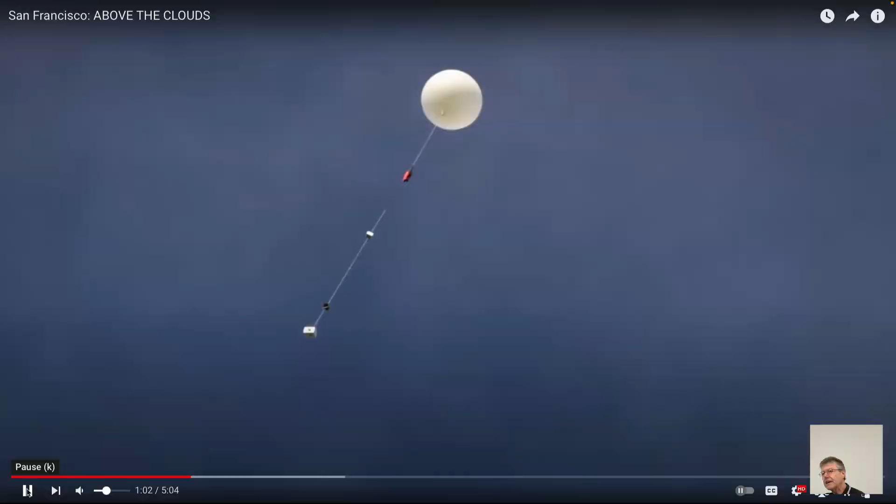It's kind of cool - a bunch of youngsters making a balloon.

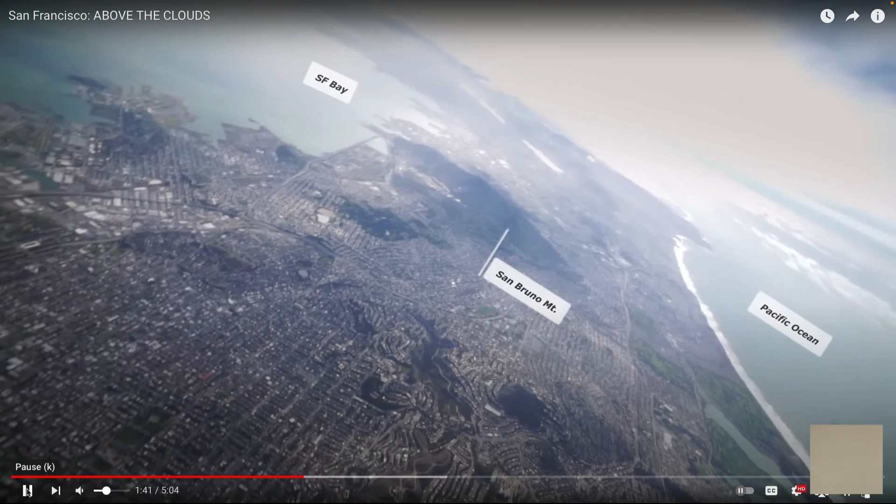Of course, it's kind of in the flight path. As you take off north out of San Francisco International, you go right across the east side of the city on the bay, so I'm not sure how that quite works out, like a flight path.

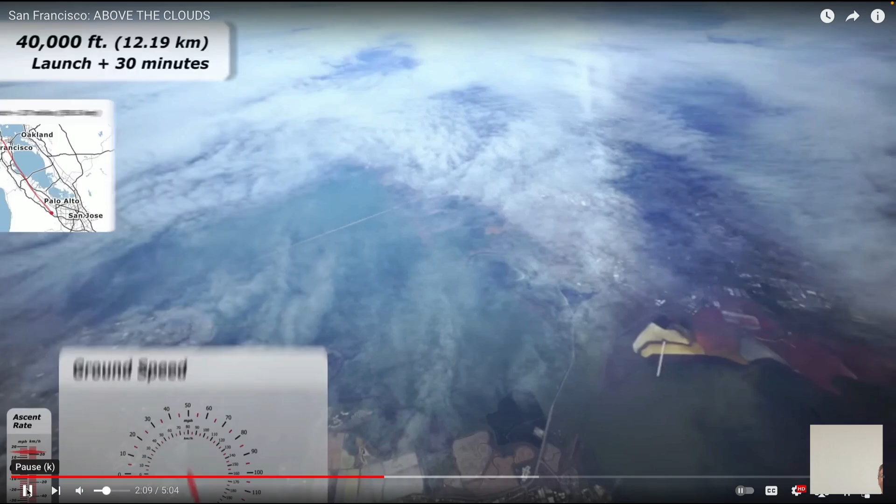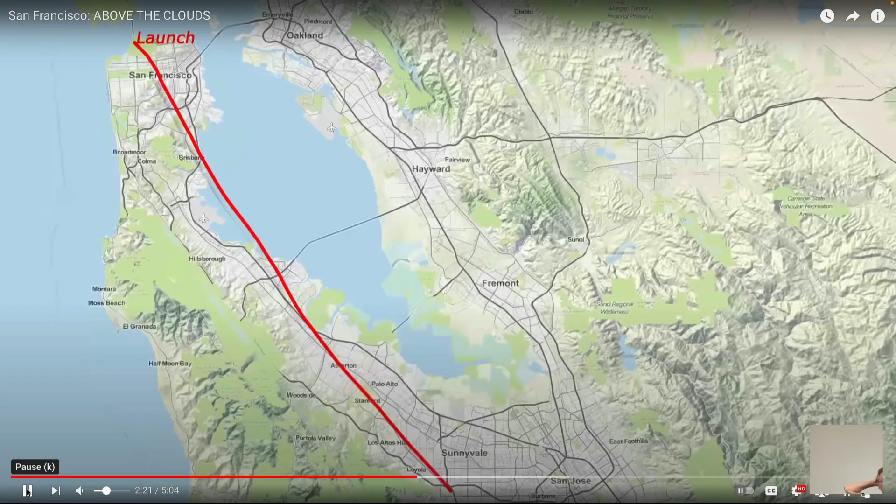Actually, that's pretty much the path of the San Andreas Fault, as it turns out.

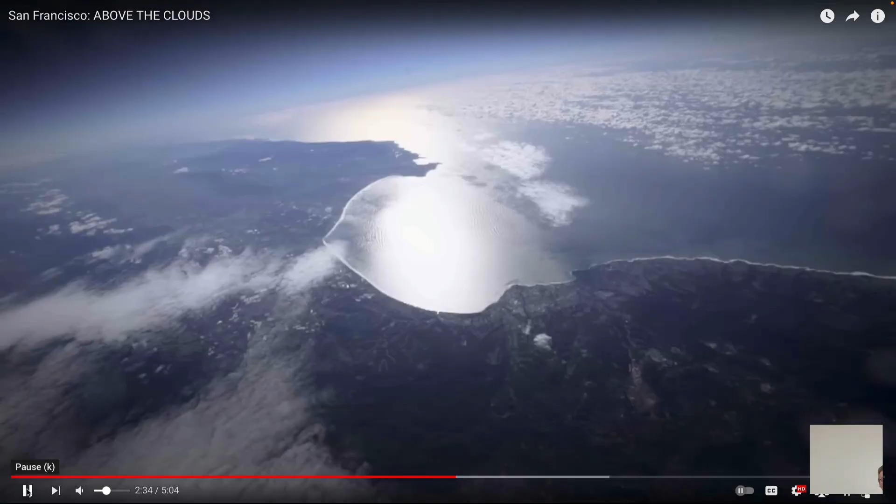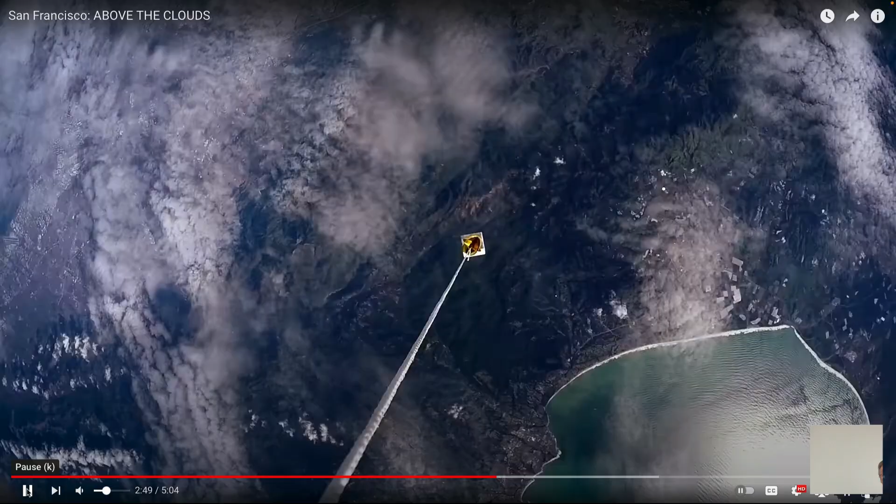So, 90,000 feet - so planes are, I guess, below the flight path now, right? For sure, planes would go up to 36,000, something like that - 10 kilometers.

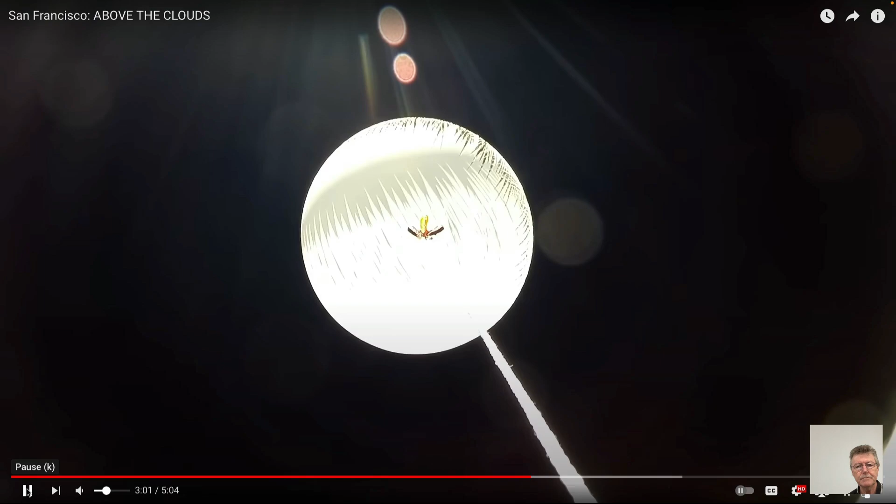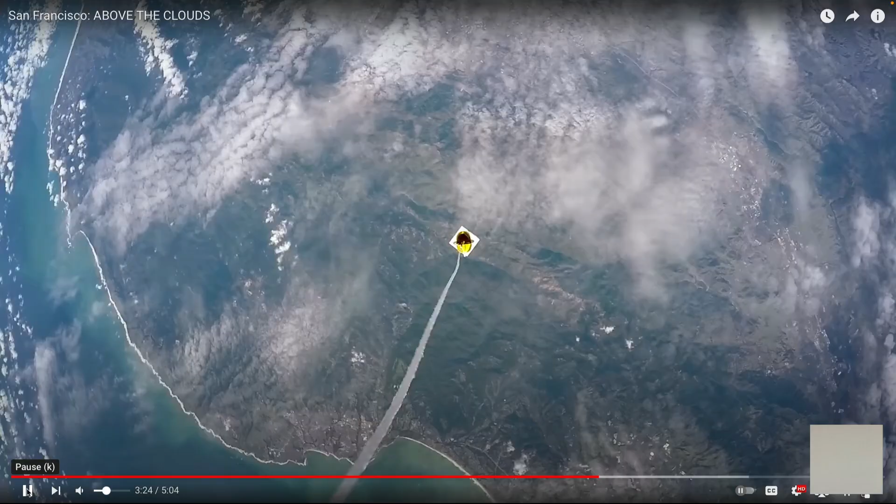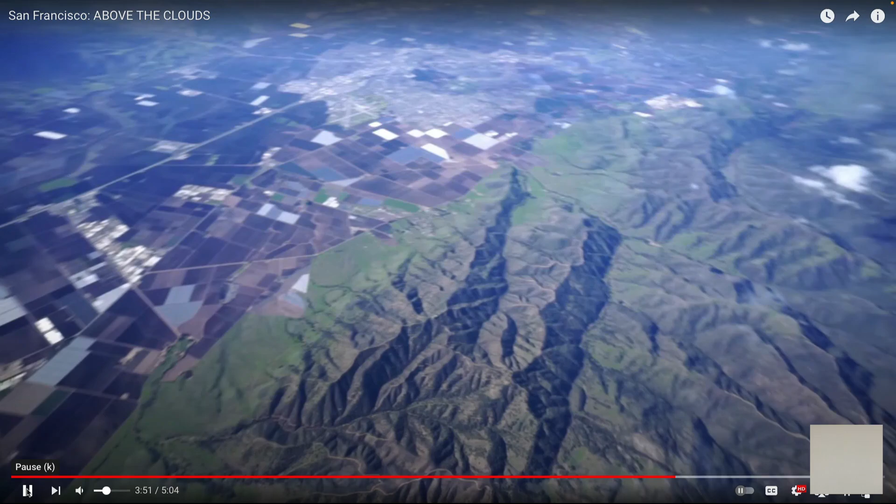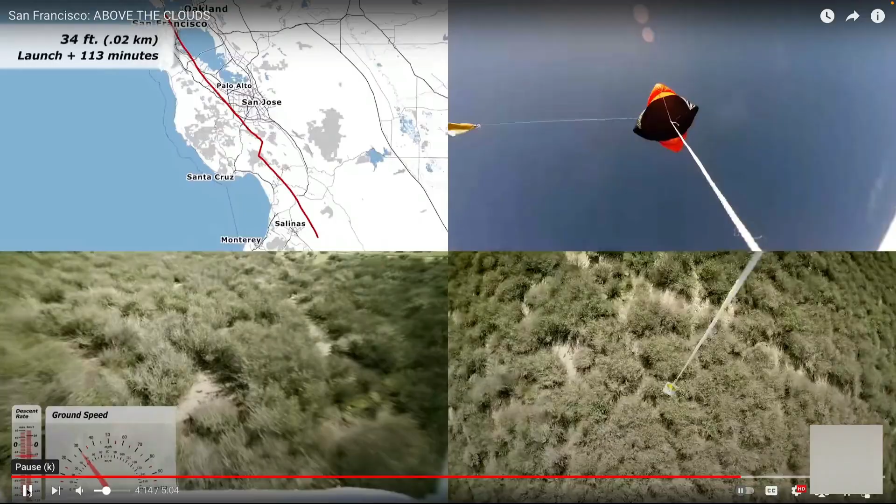And so it shatters, it comes down on a parachute. They must have GPS attached to it - they go looking for it, and then they retrieve it. So, yeah, pretty clever.

The exuberance of youth. Yeah, fun. So, anyway.

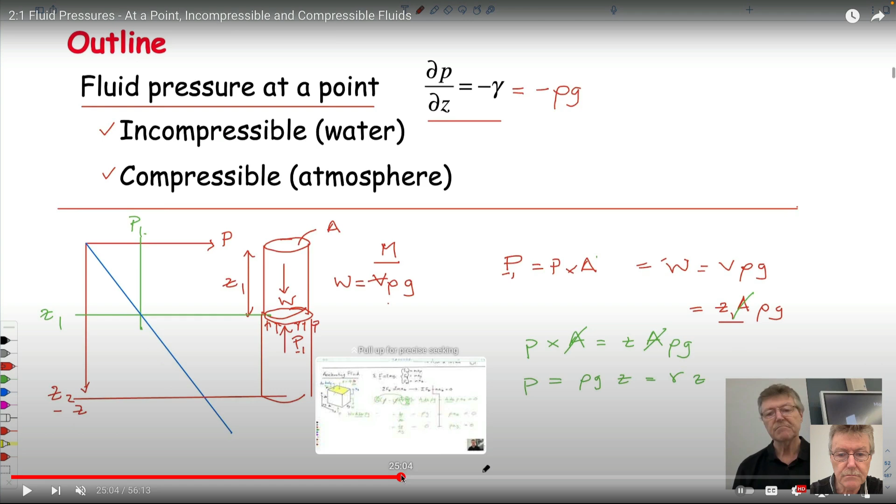If instead of a round bucket we take a differential cube, dx by dy by dz, we work in what's called a right-hand coordinate system. This is my right hand, x, y, z. In our class, z is always vertically upwards, increasing with elevation, just for the sign convention we use.

We can take this bucket, now a cube, and look at the forces applied to it. We have the weight of the fluid in the weightless bucket, which is just the area times the height times unit weight of fluid. We could apply a vertical acceleration to it by pushing it up in the vertical direction, or in the x direction, or in the y direction.

We can look at how pressure changes from underneath the cube to a small change in pressure dP. If we multiply this by dz, we have a change in pressure with z. It doesn't matter, it's explained to you if you look at the movie.

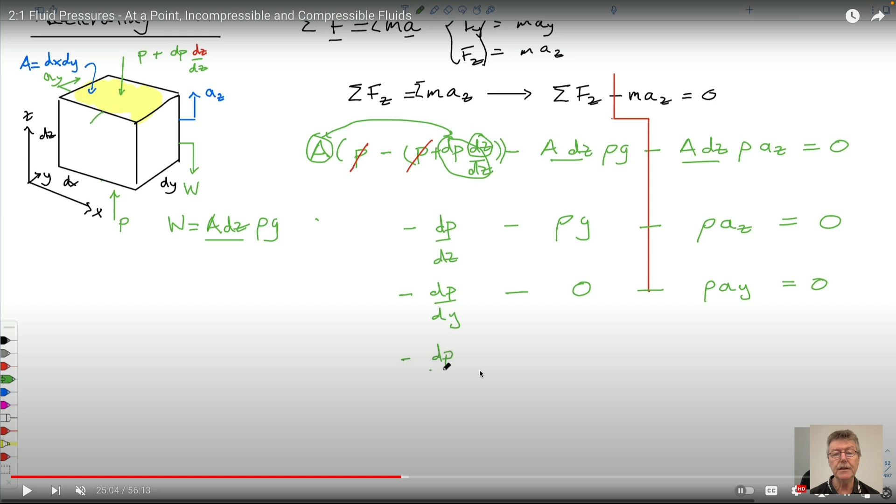We can now get a little more sophisticated in the expressions we get. We end up with three differential equations, resolving first in the z direction, then the x direction, then the y direction. Just F equals ma. The line being drawn down here separates the part which is mass times acceleration, density times acceleration, from the part that are the forces, part of Newton's second law, F equals ma. It looks complicated because it's a differential, but these are the expressions we get.

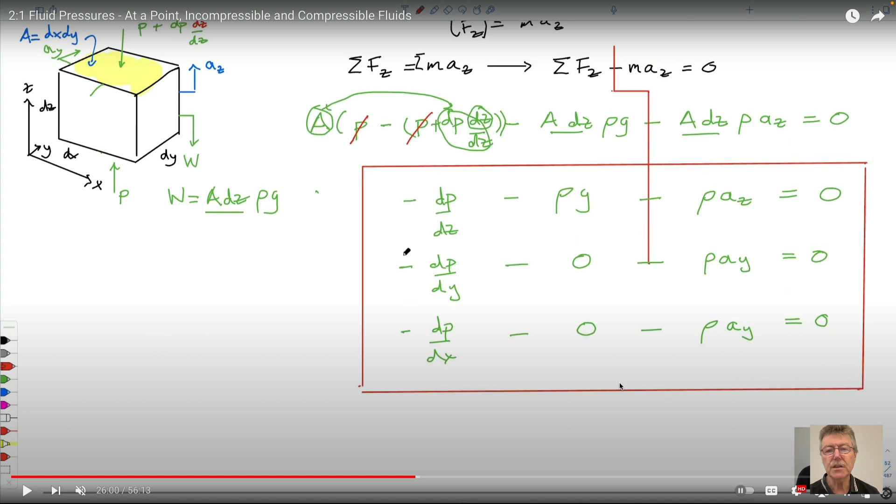In the first part of the class we'll use those, but we'll first take these acceleration terms and throw them away, don't care about them. In that case we're left with slightly simplified equations.

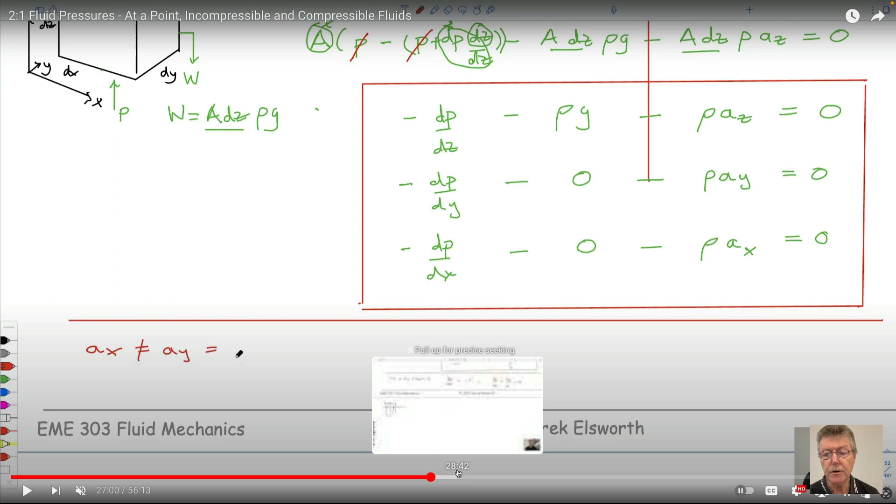If we throw this term away and look at the equations, we end up with these expressions: the rate of change in pressure with depth is equal to minus the unit weight. Unit weight is density times gravity. That's true whether we have a liquid or a gas. It's important to know that it's just that the unit weight will change in a gas with pressure, and we have to know that.

From the other two equations, we get that the pressure change in the x direction and the pressure change in the y direction are both 0 — we've already used that. The drawing to the left is our capillary tube. Remember, we can cut it off at the bottom, lift it up, and hold the cylinder of water up by surface tension, because we know it's atmospheric pressure underneath. If we move from atmospheric pressure here to that same point, and x is the horizontal direction, the change in pressure as you go in the x direction doesn't change — if you're on the same level, by definition you have to be at the same pressure. So we've used that already.

I'm not sure we've used this one already, but we'll use it today: pressure at a point acts the same in all directions. Pressure in the x direction, the y direction, and the z direction are all the same in a static fluid.

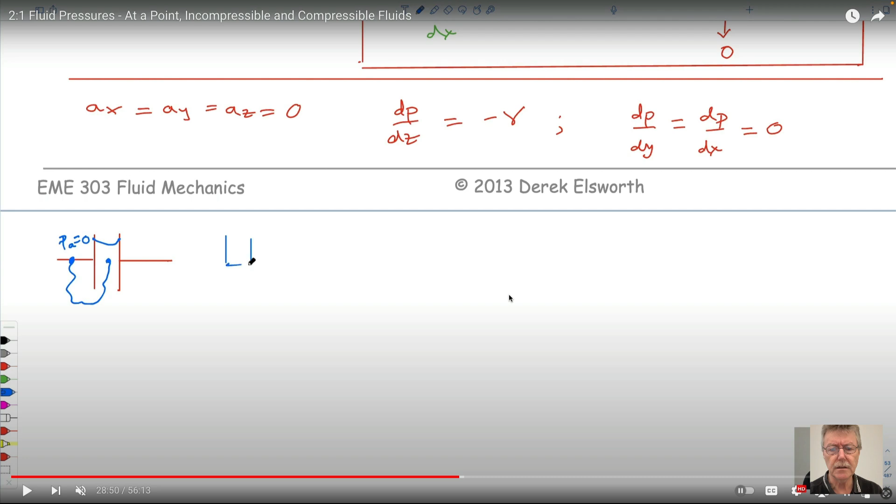What a nice looking guy there — just caught him out of the corner of my eye. So, fine, if you've also looked at it, perhaps we'll do it today.

The other thing we can do is note that this is a function of density times gravity. For a compressible fluid, like the air around us, density changes as a function of pressure. If pressure is in this term, then we have pressure on both sides of the equation, so things get more complicated — it's not such a simple expression to solve.

If we're in water, in a swimming pool, then this is all that the derivation gives us — you should have seen it, don't worry about it. But let's have a look at this.

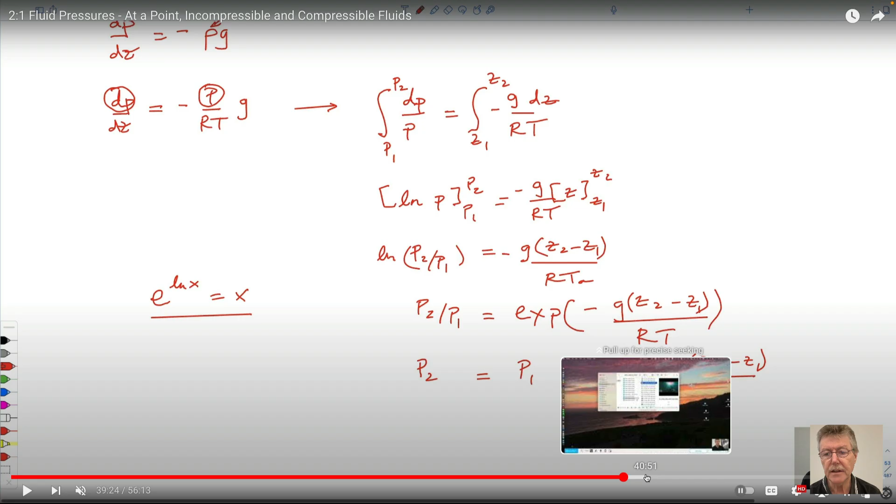Let's look at exactly what that should look like. We talked about absolute pressure and absolute temperature. Absolute pressure is what we sit at, about 100,000 newtons per meter squared — the pressure of the air above us, the column going up through the troposphere, stratosphere, and so on. Actually, from that pressure and the ideal gas law, you could calculate exactly how many air molecules there are in the world if you wanted to — it's a pretty simple calculation.

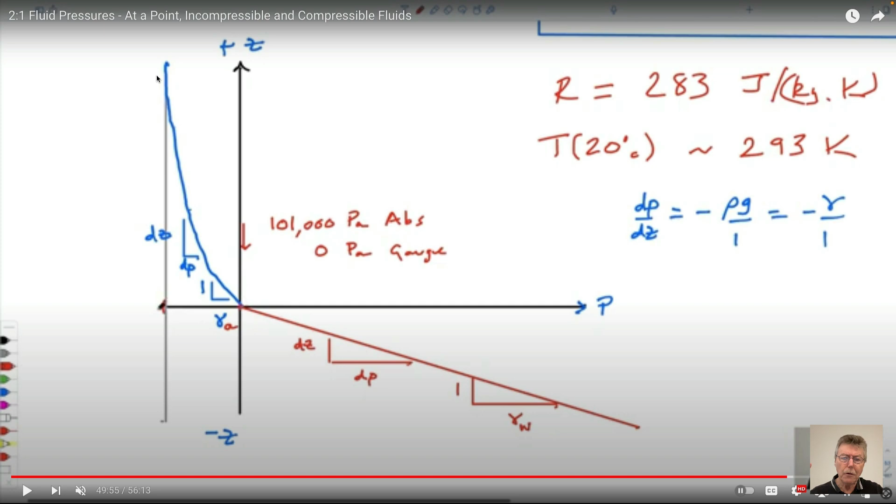So that's the difference - that's what you would have seen if you looked at the material over the weekend. That's our task for today.

I will start off from this. I'm not sure if I answered your question, but hold on - I'm not sure. So these are the same expressions that we had, that I noted.

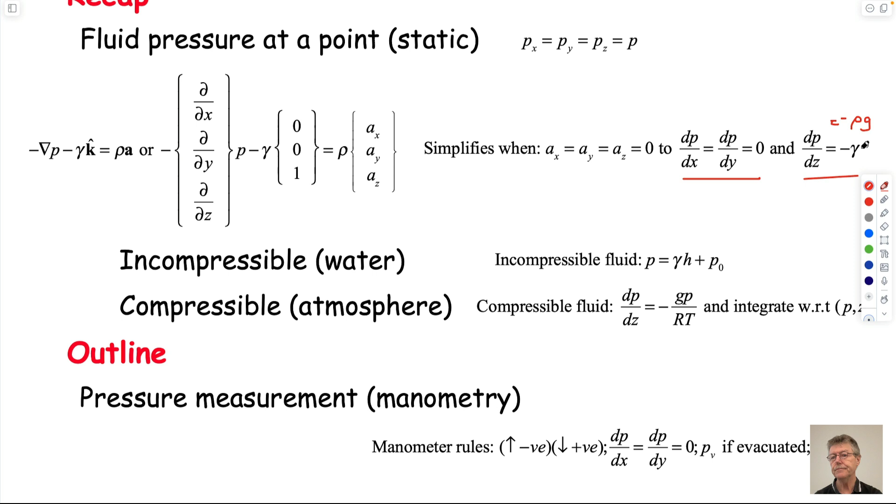These are the same equations we wrote out, and as I mentioned, the only two expressions that are important are that the pressure as you go horizontally stays the same in a static fluid, and as you go vertically in a static fluid, the pressure changes according to the density times gravity - the density of the fluid as you go through it.

What you can do, and I won't do it here, is take this expression and write it as dP is equal to minus unit weight dz. You could integrate between Z1 and Z2, and P2 and P1.

And if you did that, you'd end up finding that if you plot pressure versus depth - this is positive Z, this is negative Z - then we end up with something that looks like this for an incompressible fluid.

And it's exactly this expression here, and what this is equal to is P1, this is equal to P2, this is equal to Z, which is negative.

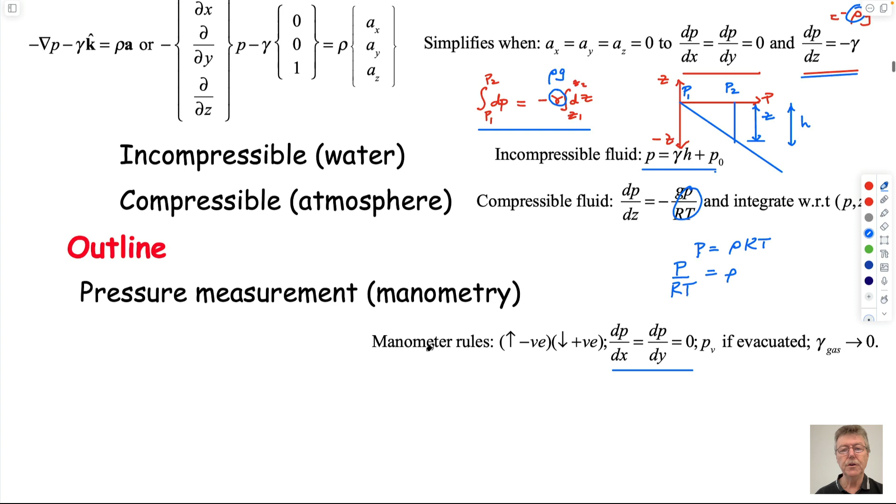You can use these two things you know: how pressure changes with depth, and the fact that pressure doesn't change as you go horizontally. We can use those to make measurements of pressure, which we'll spend most of today doing.

So these are notes here. We did this last time, so I'm not going to go through that again.

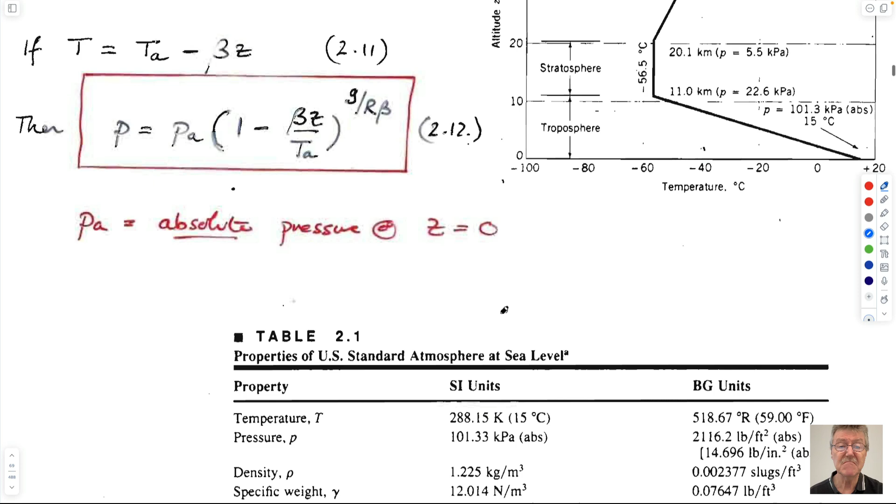So how are we going to use this? I will do this, I will go here. I guess this is what I wanted. Let's listen to this.

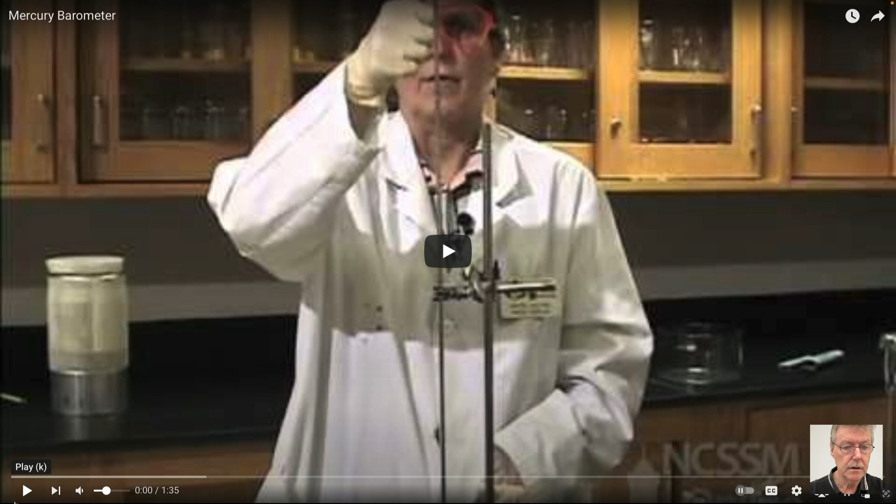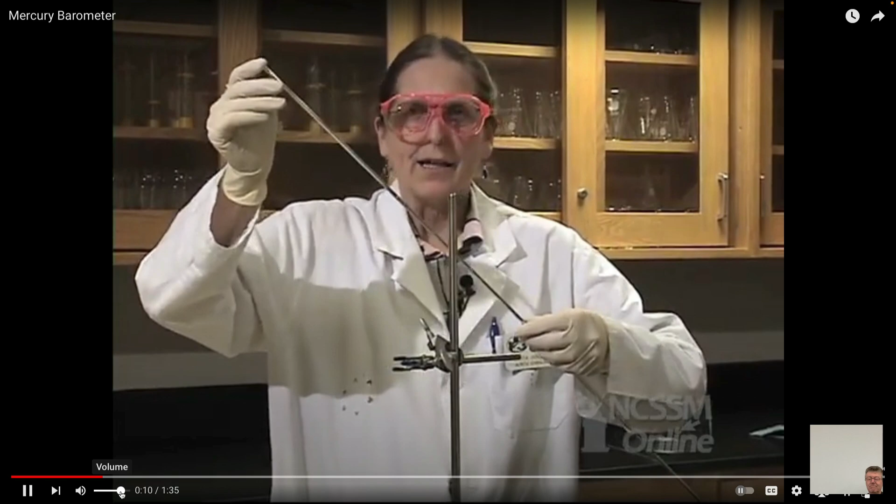We're going to make a barometer. What I have here is a glass tube that's about 800 millimeters long, and I've filled it with mercury almost to the top. I'm going to finish filling it all the way to the very top, then put my finger over the end and invert it.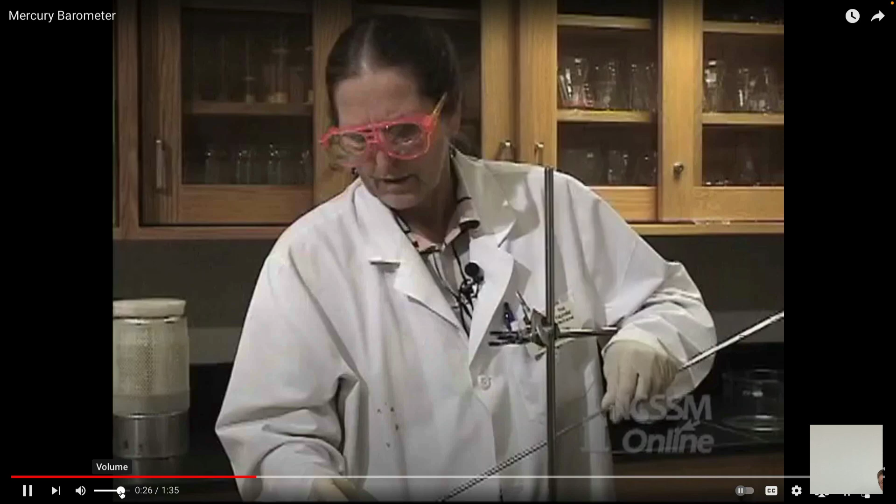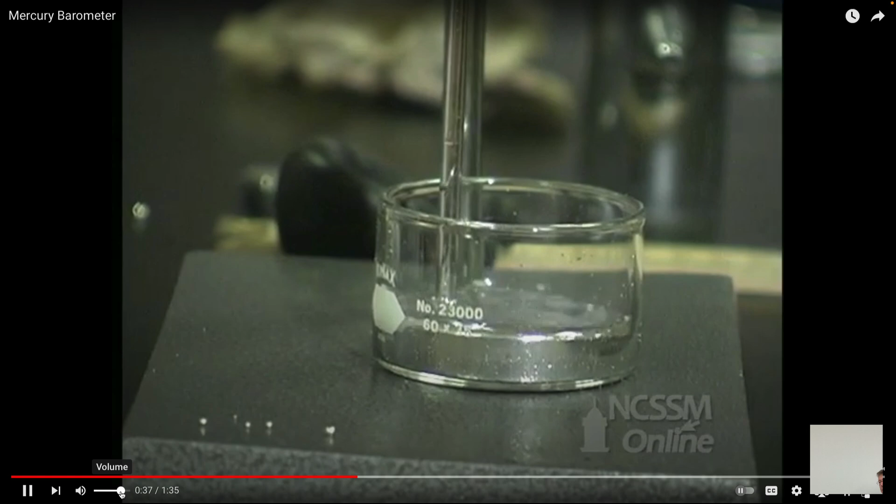I'm going to invert it into the mercury, set it here, and use our little beads of mercury floating to hold it steady. Now what's keeping this mercury up? It's atmospheric pressure pushing down on the mercury, pushing this up.

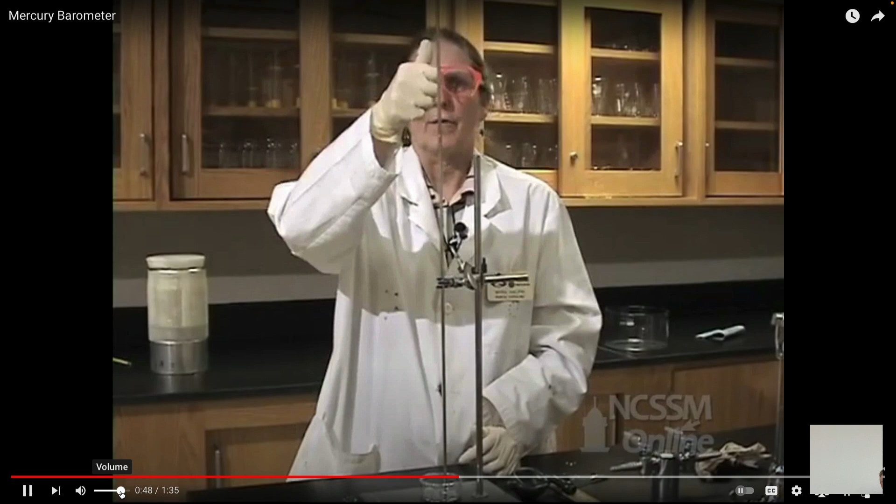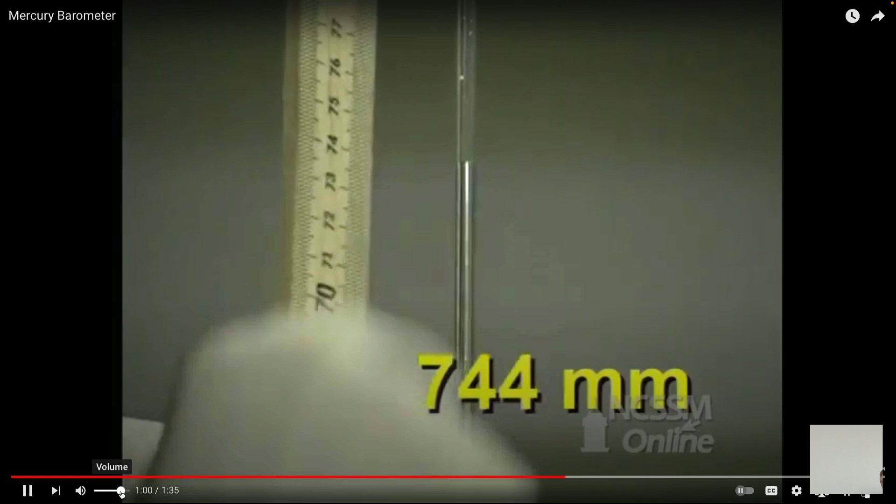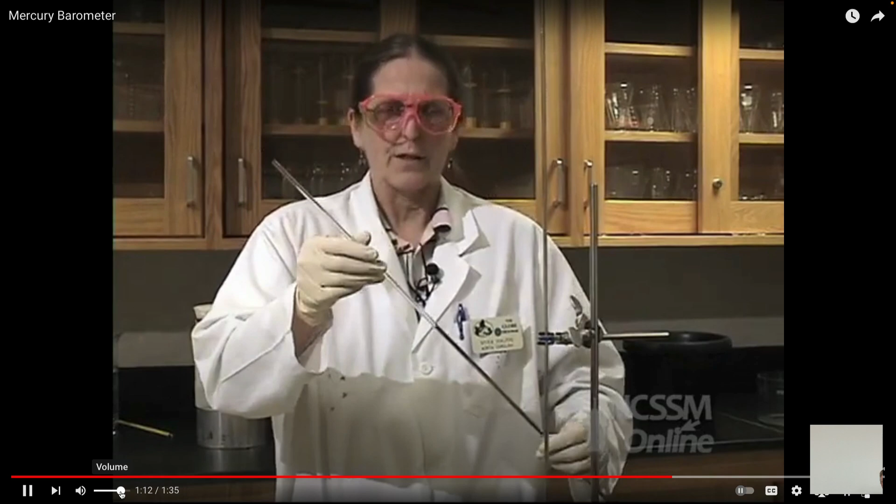Let's see how tall our column is: 744 millimeters. It doesn't matter what size the diameter of our tube is, as long as it's relatively small. You can see this one's really small, and I have another one that's almost twice the diameter, but it doesn't make much difference — the level is the same in both tubes.

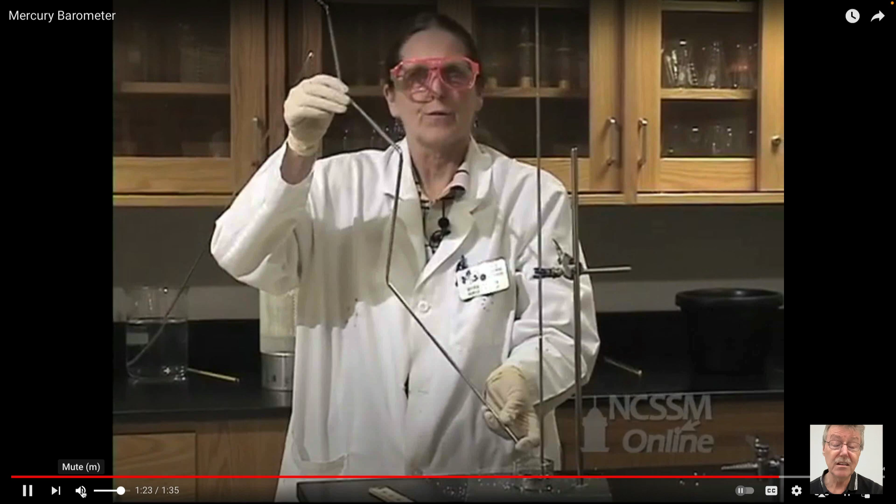What we're going to do is compare this barometer to the barometer we already have. Notice it rises to the same level. Okay, that's quite useful to us.

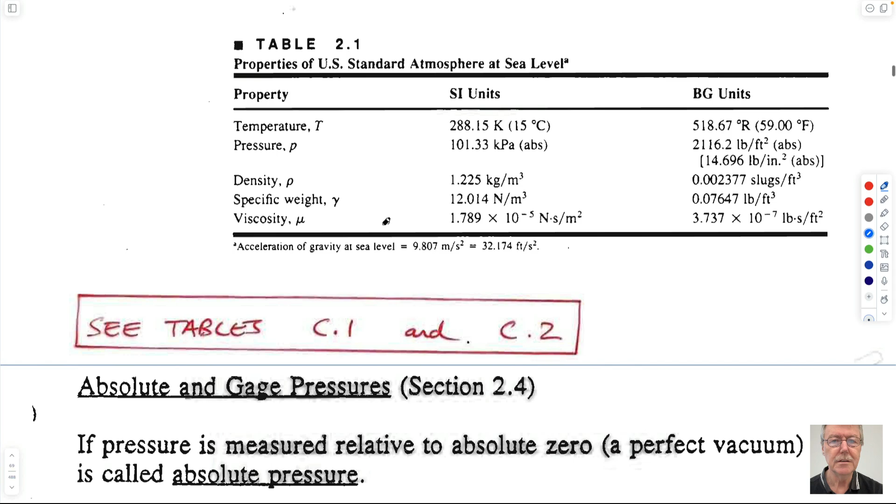So we're going to try to measure some pressures. I don't know whether it's best to look at these notes or explain it myself, but a barometer is quite useful for us here, because it accommodates all the rules of manometry, which I've written out — the manometer rules, five rules, and the barometer kind of encapsulates them.

If you go up in a fluid, the pressure decreases, so you can subtract off the pressure. Pressure is equal to unit weight of fluid multiplied by H, plus P0. Perhaps we can draw it slightly differently.

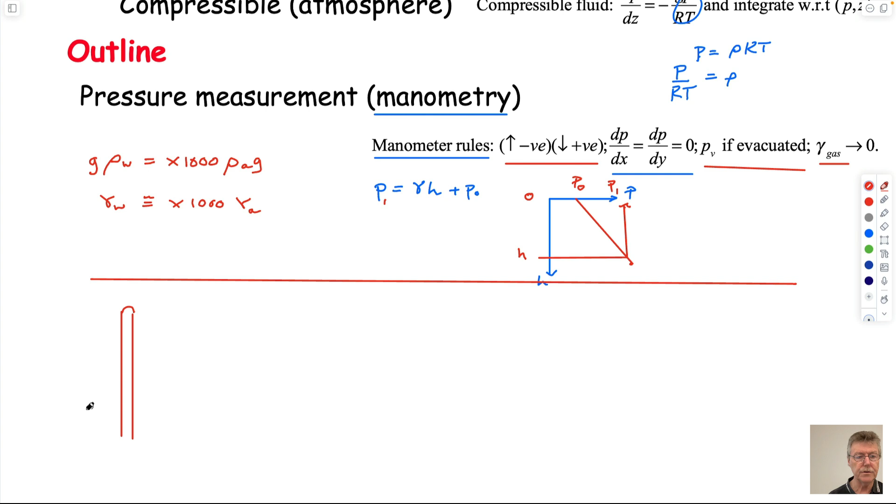It probably doesn't matter, it could be water, I suppose, right? Didn't change. It's worthwhile talking about these things. What happened was we got a meniscus. We have a height rise. And we have atmospheric pressure. So what we'd like to do is figure out exactly what this atmospheric pressure is. We don't know what it is, so we'd like to figure it out.

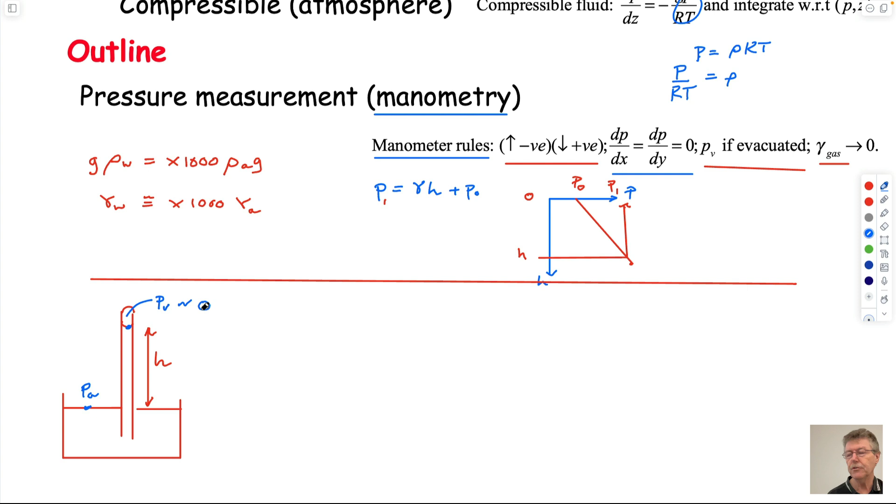If we know the pressure in here is the vapor pressure, it's almost equal to 0, but it doesn't matter what it is. What we can use is the manometry equation to go from this point through the system. So what do we know about the pressure at this point here? We know these are simply connected and on the same level, so by definition the pressure here has to be the pressure A. We could write an equation saying pressure A here is the same as here. We're going up, so we're subtracting off the height multiplied by the unit weight of mercury. And that's equal to the vapor pressure of mercury.

The density of mercury, I've got it written down here, is 13,600 compared to 1,000 kilograms per cubic meter for water. And the vapor pressure of mercury is equal to 0.025 atmospheres. An atmosphere is the same as a bar, as in barometer. This is a barometer, obviously. And 1 bar is equal to 100,000 pascals, newtons per meter squared. So it's tiny compared to this magnitude.

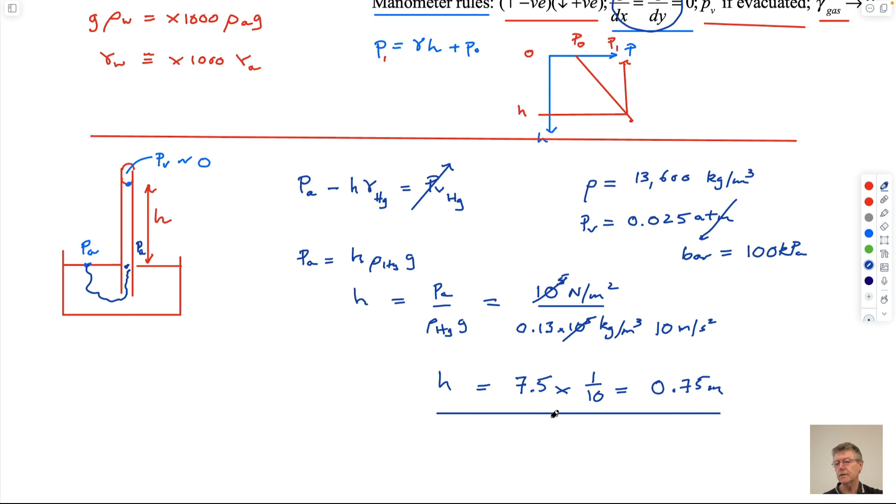So you saw in our movie with Miss Brainbox that the height was something like 744 millimeters, right? So that's the same. This is 750 millimeters just by doing this rough approximation.

So the key here is we've used all of these components of the so-called manometer rules. We've gone horizontally on a pathway that's simply connected. In other words, we can get from this point to this point on the same level without going through a wall, so this pressure here has to be the same. We've gone up, so we've subtracted the height of the column multiplied by the unit weight from the pressure. We've ended up in an evacuated space, so this space is equal to the vapor pressure. We've chosen to make it equal to 0, even though it's a very small number. You can do it with a small number and figure out what it is. And so we've used that to calculate what h is. The reality is that's kind of a circular argument. Why do you want to do that?

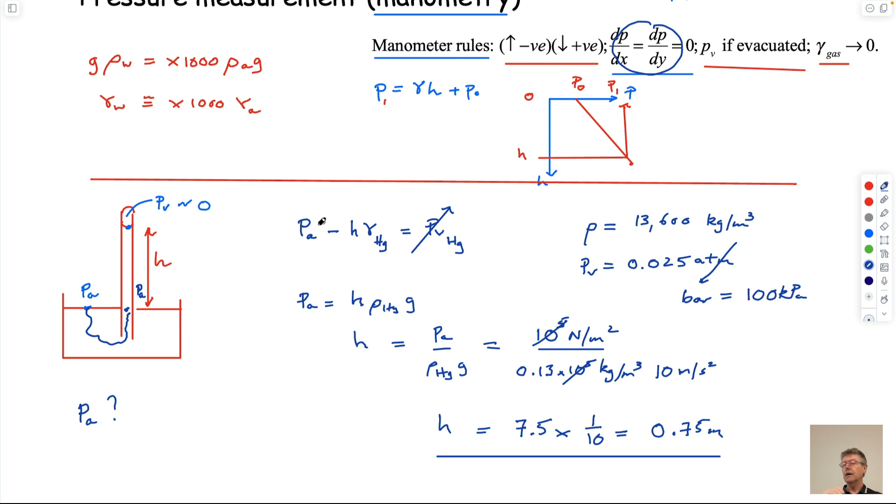Well, what we want to do is know what the atmospheric pressure is. So we'd measure the height, we'd know the vapor pressure of mercury is essentially zero, and from that height we'd be able to measure the atmospheric pressure. That lets you gauge small variations in atmospheric pressure, the highs and lows of the atmosphere as weather moves in. So that's what a barometer is used for.

You could also use water in this. Some of these barometers are filled with water. The density of water is 1,000 kilograms per meter cubed. The vapor pressure of water I wrote down is 0.03 atmospheres, as opposed to mercury's, which is really low - there's an extra zero in there. So the vapor pressure for water, H2O, is actually very small too, so you can do this calculation.

But just from this, if we used water, how tall would the column be relative to that? How tall would the column need to be to measure 1 atmosphere? 13 times 0.75, so that's about 10 meters. So H for water would be about 10 meters. 10 meters is 3 stories - 1 story is 3 meters or 10 feet, so that's 30 feet. It's the height of a house.

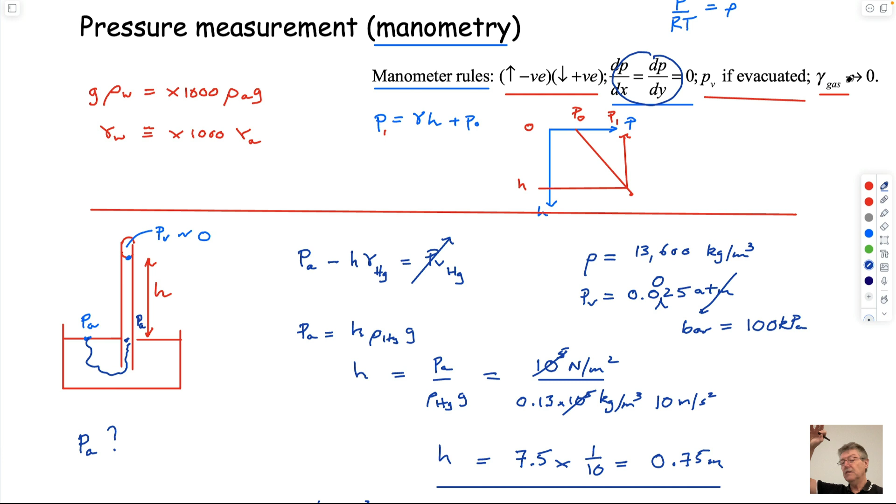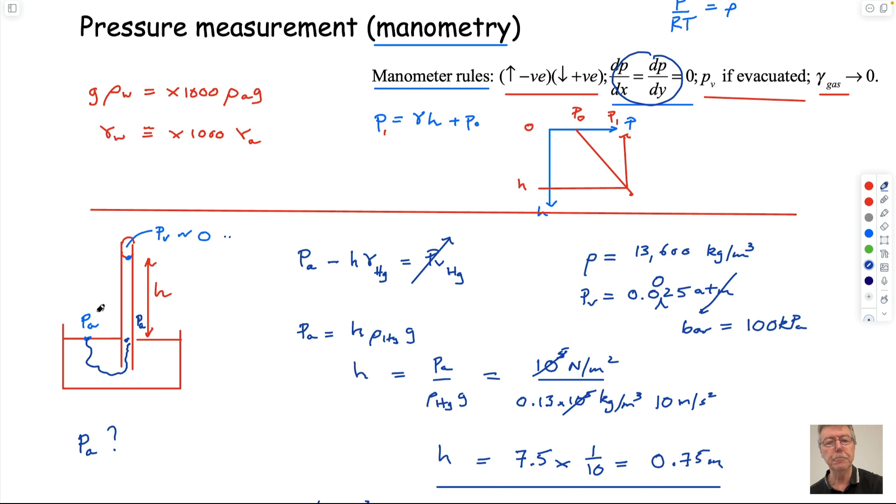So that's really what we want to be able to do. That's a useful example because it encapsulates all the principles here. The other example is that if you go up in a gas, the pressure doesn't change much because the unit weight is 1/1000th the unit weight of a liquid like water, or 1/13000th the unit weight of a liquid like mercury. So the pressure at the top of this is equal to the pressure at the bottom, because the unit weight of this vapor is essentially zero density. So the pressure in that bulb has no change as you go up in elevation.

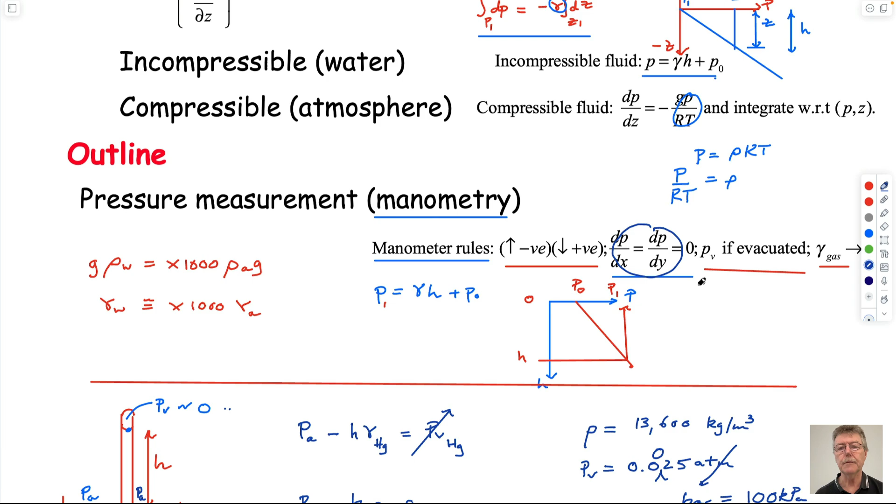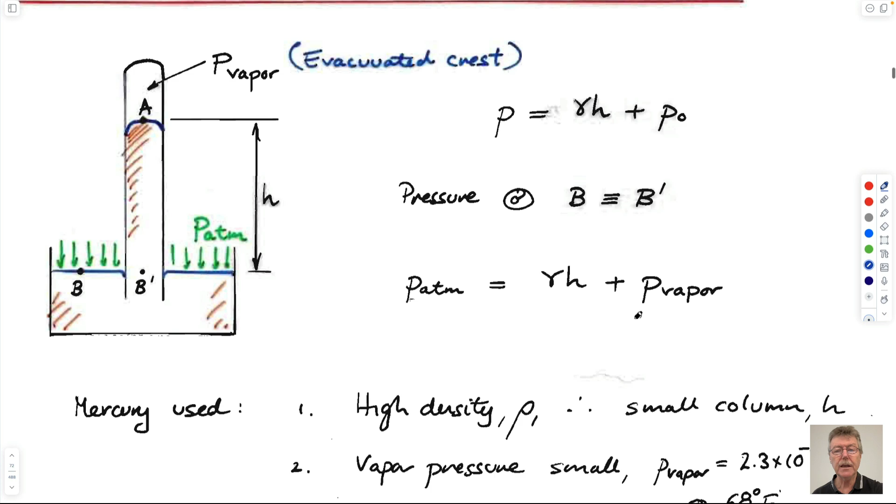Know these manometer rules because we'll use them. Let's do some examples - I won't go through this in detail, we've covered it. This is the example, if you want to check out everything I've said. And it comes in with this, this is in inches. So, manometry.

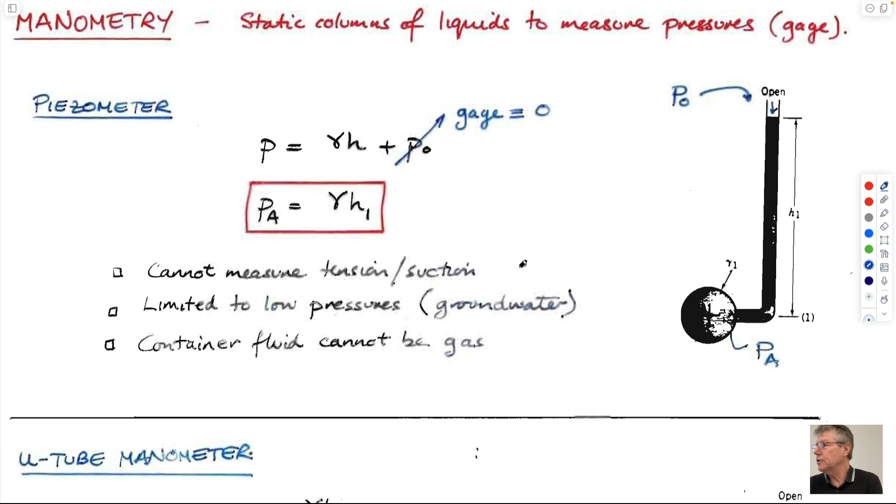Environmental systems engineers want to look at groundwater flow. You want to measure the pressures in a well - a pressure in the well here and a pressure in the well here. If they're different, that drives flow from A to B. Just like in a petroleum reservoir, if you have two different pressures at two different locations, you draw down the fluid pressure to suck out the oil or gas in a reservoir. We can do exactly the same thing here.

So we'd like to calculate the pressure in our well. The best thing to do is work from the point where you know the pressure and write it out. So here, if I wanted to know what PA is, I would write P0 plus H1 times gamma water equals PA.

If I was working in gauge pressure, the gauge pressure I feel here is 0 kilonewtons per meter squared, or 100 kPa if it's absolute. Let's do both. In gauge pressure, this would be 0 plus H times the unit weight of water equals PA in gauge. If I want it in absolute pressure, this would be 100 kPa plus H times gamma W equals PA in absolute. So they differ by 100 kilopascals.

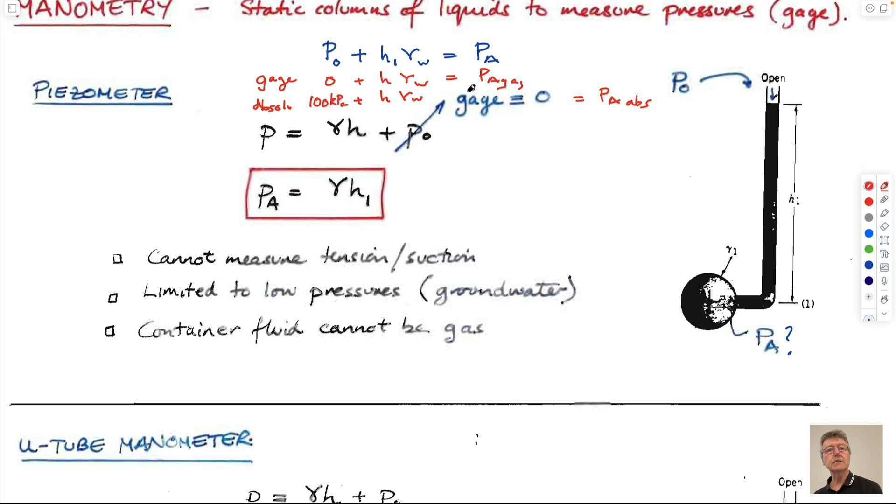That's all that gauge means. Both are correct, it's just the reference by which we're calculating them. If we want to do something fancy with the ideal gas law, we'd probably want it in absolute. But for almost all applications in this class, we'd probably work in gauge pressure, where a Bourdon gauge that measures pressure in this room would say 0 psi, 0 kPa. Just like when you pump up your tires, it uses gauge pressure, hence the term gauge.

So let's do some examples. Manometers are also used to measure pressures in pipes. This isn't a chemistry flask, it's a pipe going into the page, and we might want to know what the pressure is at this location. We'd start off at a place where we know the pressure, and work toward the pressure we want to calculate. You could use the formalism, but let's just do it differently.

So let's write it out. P4 is this. We want to get to P3. To get to P3, we have to add H2 times the unit weight of the gauge fluid, not a gas, the gauge fluid. If we're in this fluid, we can get through this pipe to get to this point, which is exactly the same level. So this gets us to P3.

Now we're at P2. To get to this point, we have to subtract H2 times the unit weight of 1, and that is equal to the pressure at point A. If we're working in gauge pressures, which we almost always will be, then by definition this is 0, atmospheric.

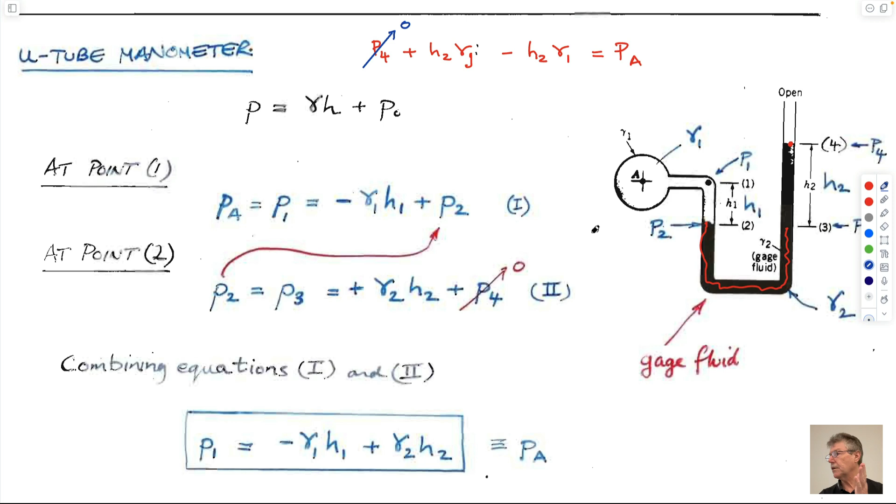This is a height which we know multiplied by the unit weight of this fluid. If it's mercury, it's 13,000 kilograms per cubic meter times acceleration due to gravity. If it's water, it's 1,000 kilograms per cubic meter. So let's assume it's water.

In this case, if it's water, this unit weight would be 1,000 kilograms per meter cubed times 9.81 meters per second squared, which is the same as unit weight, which is 9.81 kilonewtons times 10 to the 3 newtons per meter squared, if you're unsure of the units.

And then if this was a gas, we could throw away this term because it's a thousandth of that, and we could calculate what the pressure is. If you're unsure about it, go through the working, you end up with exactly the same result.

So the other result is, if the unit weight 1 is equal to a gas, then this would be essentially equal to 0. As a result, the pressure in the flask would equal H2 times gamma gauge. You can't always assume this, but if this is a gas and this is a gas, the difference in elevations is just the difference in pressures between that on the outside and that on the inside.

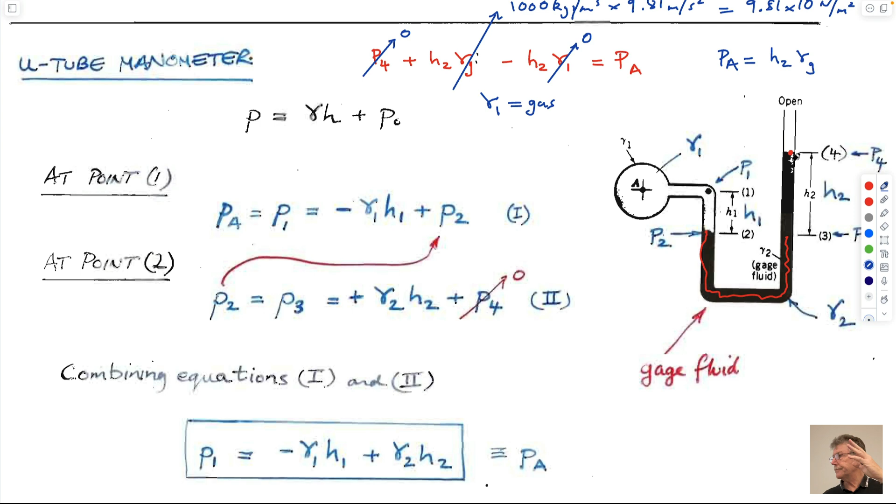In this case, this pressure is higher than that pressure, because you can imagine inflating the balloon, it pushes a pressure to push against this. So by the pressure you're applying here, you're holding up this column of fluid which is trying to collapse down onto you by its own weight. So in this case, the pressure in here would be higher than out here. If it was the other way around, then the pressure outside would be higher than the pressure inside.

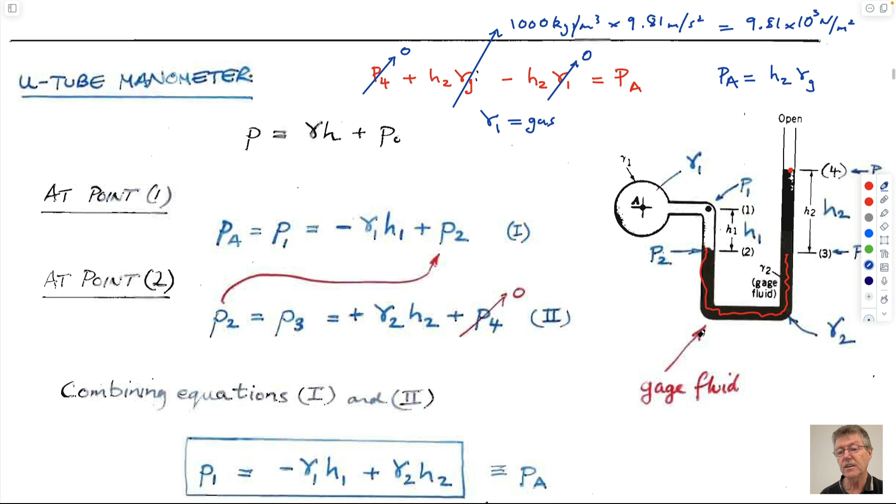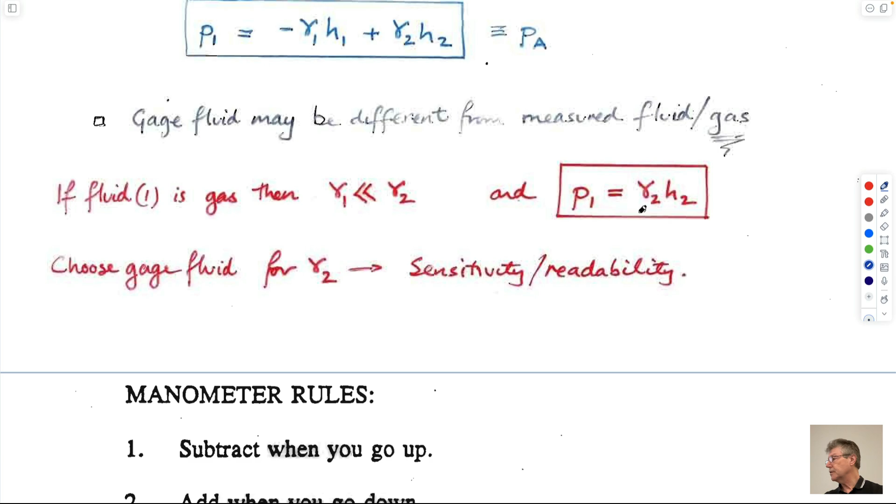So if there's a gas in here and we don't care about the unit weight of this, then the equation reduces so that the interior pressure is just the height of the mercury column, or the liquid column, multiplied by its density. And again, we like to use a dense liquid because we don't have to have such a high column to measure the difference.

So these are the manometer rules: subtract when you go up, add when you go down. Use 0 for gauge pressure. If it's a closed vessel, use the vapor pressure. If you have specific gravities, it doesn't matter.

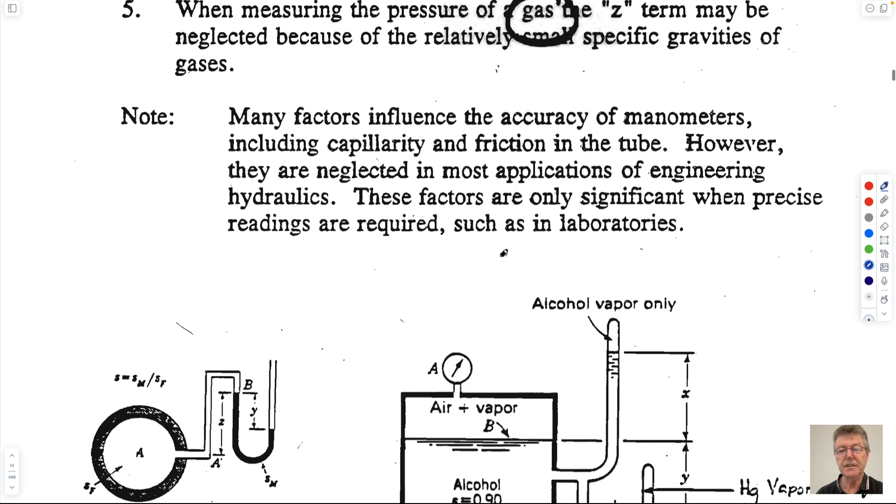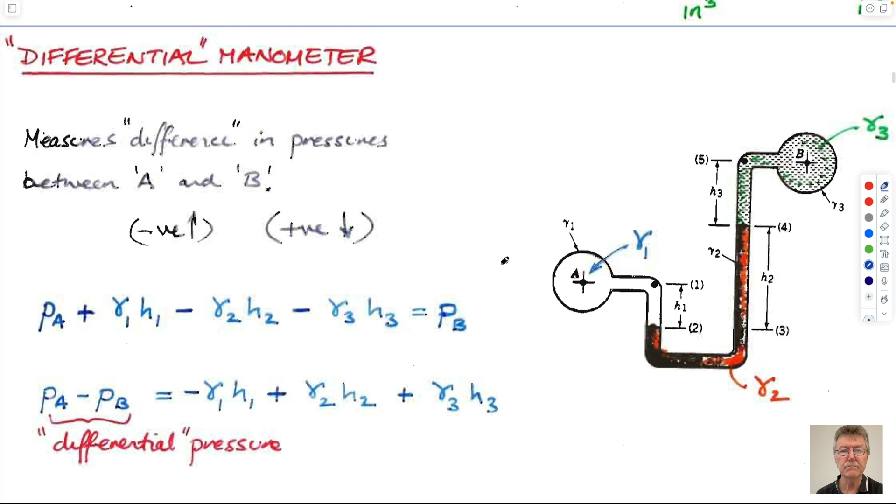Okay, do we want to do more? I can't remember what the different ones we have are. I'm just looking at these. They're pretty much same old, same old.

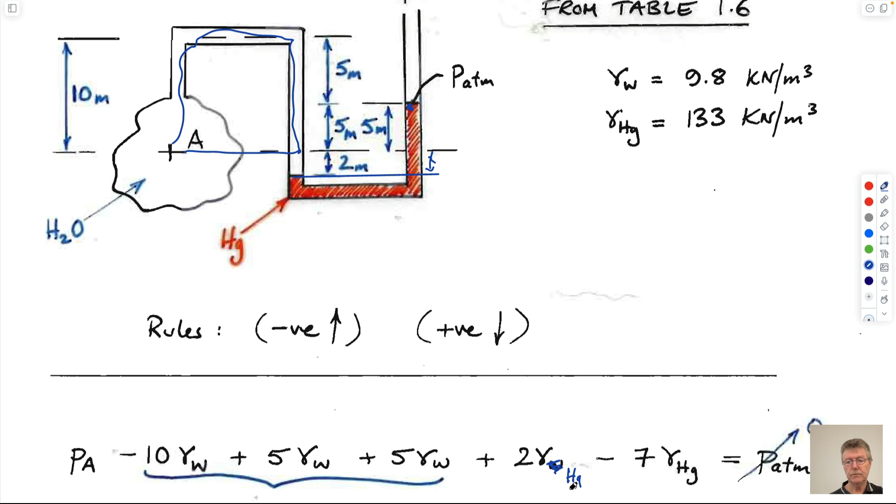Right, that's correct. We've gone down in mercury 2 meters, which is this term here, and then we've gone up in mercury, which is 2 meters plus 5 meters, 7 meters. And that gets us to this point, which is equal to atmospheric pressure.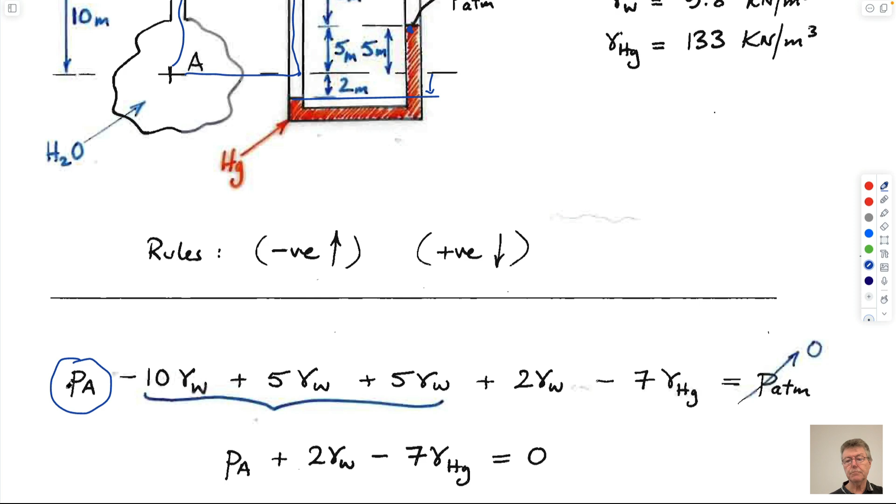If we'd written it the other way around, starting here and going through to end up at this, we'd have this immediately. But we just have to do the substitution for these to get the magnitude of this particular pressure here, and it's given here. You can go through the numbers if you so wish.

This is the density of mercury, 133 kilonewtons per meter cubed. So this is 133 kilonewtons per meter cubed, and you have to be consistent with your units as we talked earlier, right? Okay?

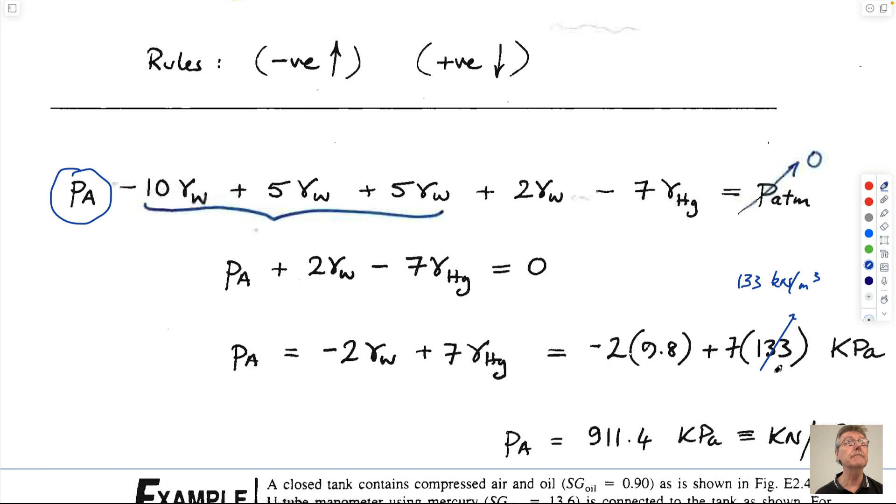Can you review what the V and the E stand for in the manometry rule? Oh, negative and positive - plus VE is positive. What is the V? It's just my shorthand. If you write the word positive, it's equal to... it's shorthand, it means positive.

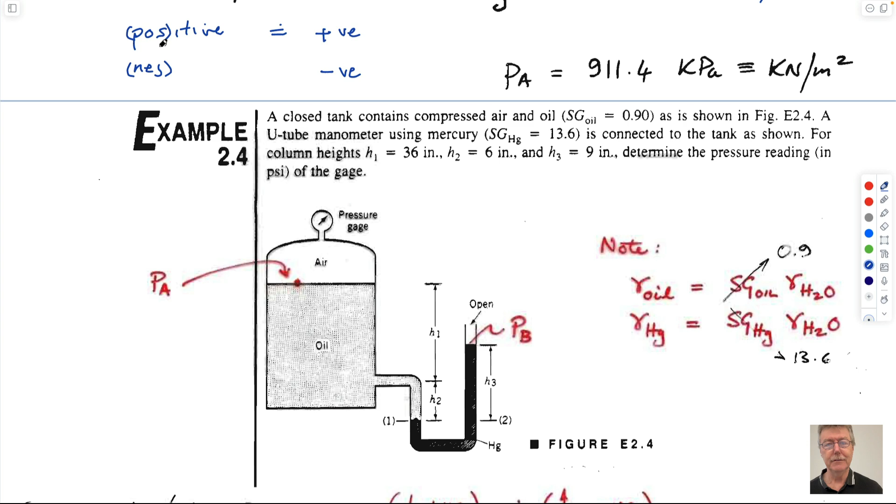Good question. What language is this guy speaking? And writing? Badly. Okay, any other questions? Joe? I mean, it's all very logical.

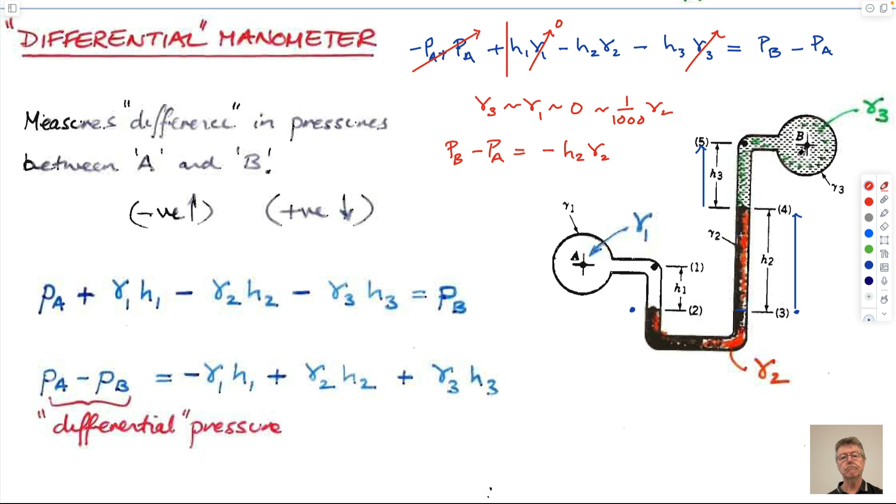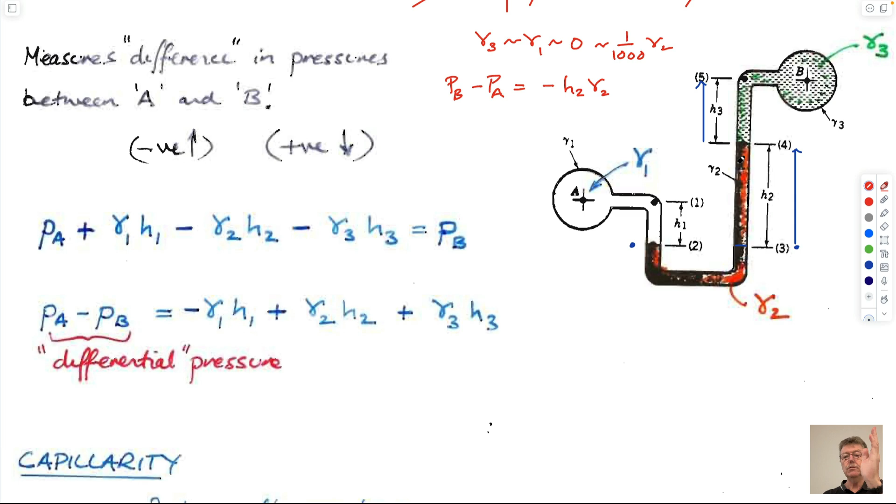If we weren't very good at being able to resolve exactly the height difference between this level here and this level here, what we could do is cant the tube over so that a small differential change in height manifests itself as a long differential change along the tube. So if we can measure this at higher resolution because it has a bigger range, then that might allow us to get a better reading of the difference between these pressures. That's the point of this one.

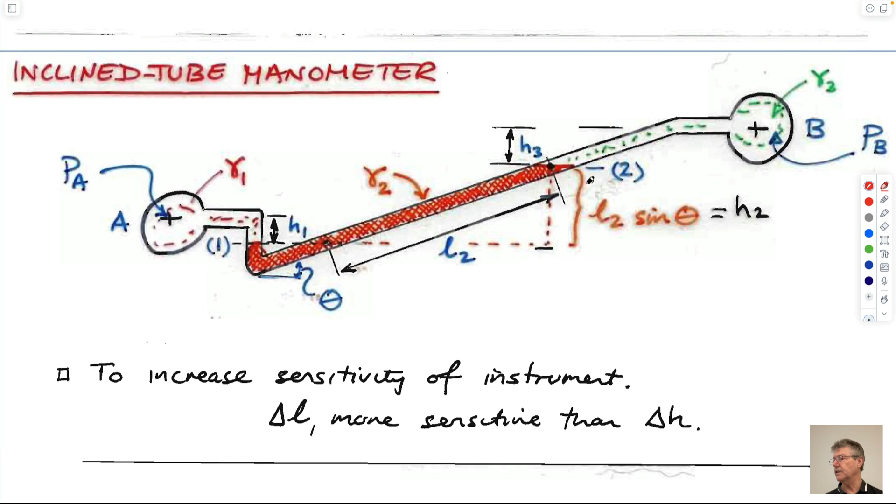I'm not going to do it - we're right on the witching hour, and so these are all backed up. Well, maybe I'll talk about those next time.